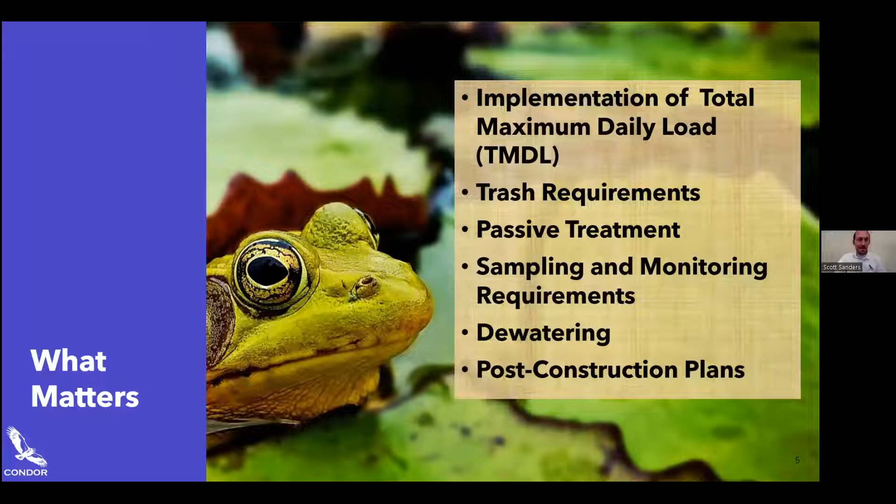New stuff in the permit. All right, so I want to start with some important dates. We do have a new permit, so when does it all kick in?

Well, it's not going to be until next year - the effective date of the new permit is September 1st, 2023. That means if you get a WDID number after that date, you will be complying with the new permit. If you get a WDID number issued before that date, then you will be complying with the 2009 old permit all the way up until September 1st, 2025. They'll give you time to get used to that new permit. So after September 1st, 2025, we'll all be in the new world with our new permit here.

And then we're going to begin the new permit part of the show with - what is a TMDL? Well, if you're new to the stormwater world, or you've been in here, you know we love our abbreviations and acronyms. TMDL means, of course, 'too many darn letters' is what we got to remember, and everything has an acronym or abbreviation. But TMDL means total maximum daily load. Now, how can we show this easily to people who might not really grasp the idea of what a total maximum daily load is?

Let's pretend we have a river. I'm actually doing this presentation in Petaluma, so I'll kind of theme some of my rivers and stuff to stuff around here.

This is about rivers flowing into the ocean. So let's pretend this is our Napa River right here, and we have sources of pollutants coming from agricultural, natural, industry, and residential impact. Well, with the new construction general permit, we're adding construction right there into it as one of the polluters going into this Napa River.

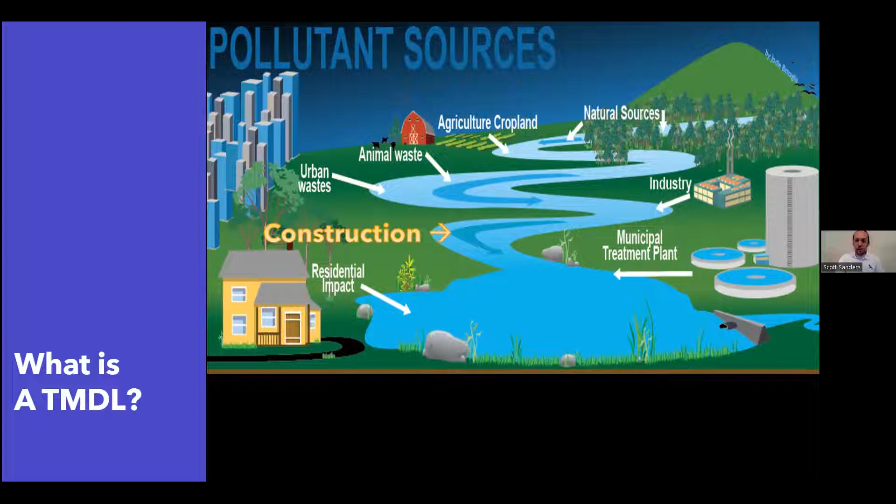So how do we get a TMDL? Well, we get some highly trained scientists to get on the case, and they can spend anywhere from 4 to 6 years analyzing the river, seeing its beneficial uses, seeing who's polluting it, what pollutants are going in there, and then they realize a certain level that this river can accept. That's going to be your total maximum daily load.

That's going to be what you as a construction site can put into that river to keep its beneficial uses going. So what does that mean for you as a SWPPP QSD? Well, that means that when you're creating your SWPPP, you're going to have to find out if you're a responsible discharger. How do you find out? Table H. Table H in the new permit will go over all the TMDLs in the water bodies you're working around.

If you're in region 5, you know who cares about TMDLs? The fish. So our little friend, the fish, is going to stick in on this part of the presentation because he's very interested in this. So if you're in region 5, you actually don't have any TMDLs to worry about right now.

So you're all good. I'm in Petaluma over here, so I'm looking at region 2. Napa River has a sediment TMDL. So I found out, yeah, my construction site's on the Napa River. I'm discharging right into it. I'm a responsible discharger. The TMDL is sediment. What does that mean? The new permit will explain for you.

You look for which constituent that you're discharging into there. We're doing sediment. So to comply with this new permit, you're going to have to do RUSLE2 modeling. You're going to have to show that the BMPs you're putting on your site are going to bring your waste load allocation number down.

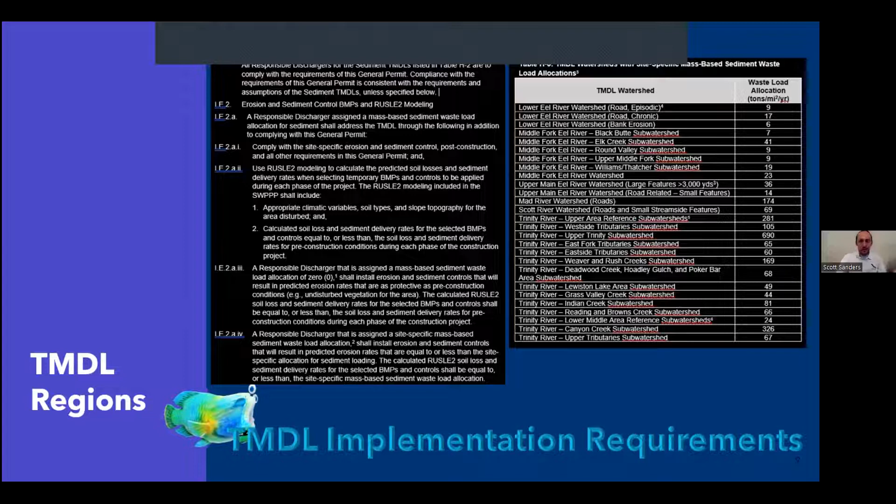I went to look for the Napa River. It wasn't here in table H3. They had a little side note that said go look at the fact sheet if you want to find out about your river. So I did. And what the fact sheet told me was the Napa River has a TMDL of 500 tons per year. So why wasn't it over here in table H?

Well, they say that's the current natural load of construction sites anyway. So what they're saying is if you comply with this permit the way it's written, you're going to comply with that TMDL. So it was easy for that one. But other ones, you might have to comply with the waste load allocation number that's different, and that means extra sampling and extra BMPs to bring your numbers down.

All right, and that was it for TMDLs. That's a big thing going on, but again, those TMDLs are only going to be for responsible dischargers. So you might be in an area where there are no TMDLs, and you're going to be okay.

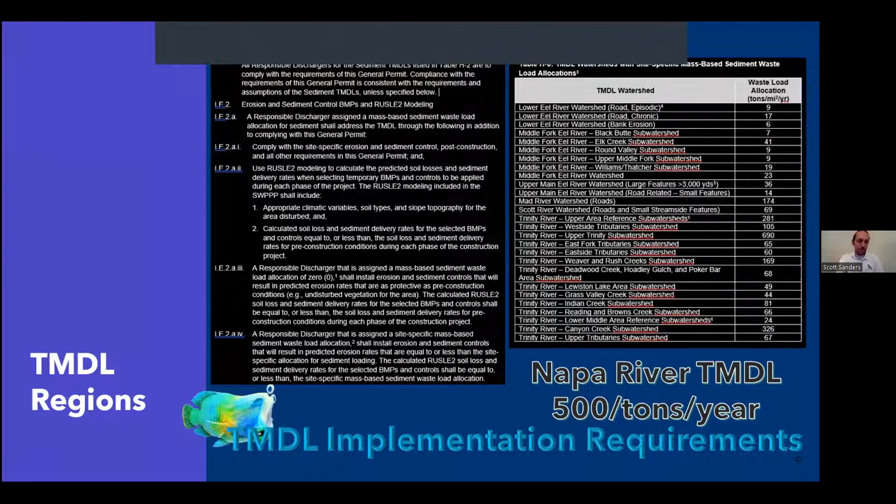So what does that mean? Are we going to be installing full capture systems on our sites? I'm not sure where the permit's going with this, but we're going to have to limit any trash from leaving the site—not unlike the order that municipalities have to follow. They have to do monitoring requirements, track 1 or track 2. I haven't seen those yet in the new permit, but it's something to keep an eye on.

Passive treatment technologies—these are also going to be fortified in the new permit. The way things have been going, they're trying to change it up.

So for those using passive treatment, a quick overview: passive treatment means you're putting chemicals in the water, they bind to the soil and sediment, and weigh it down, leaving you with clean water. Hopefully that clean water gets sent downstream.

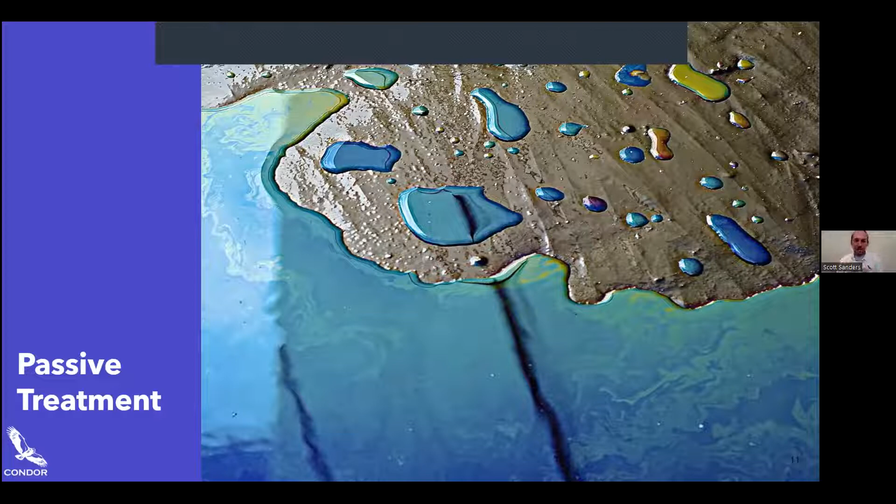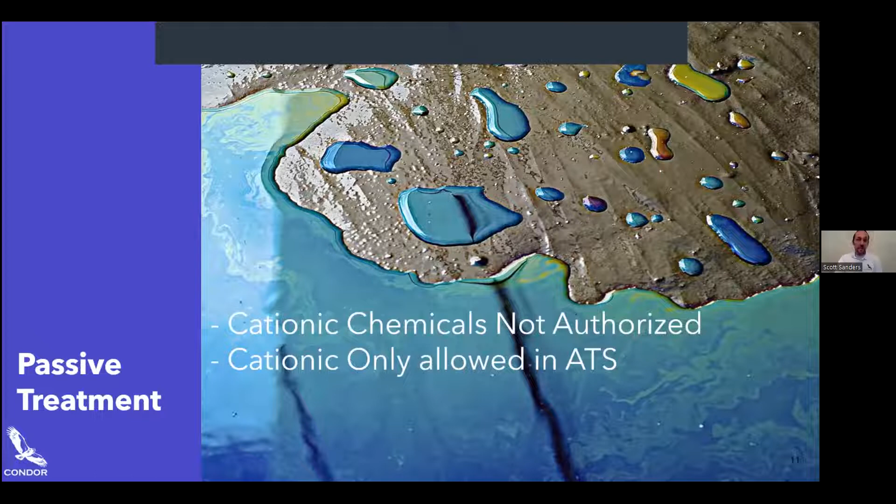But what they're finding is that water sent downstream is causing problems with fish gills. So what are they doing? They're removing cationic chemicals - they're not authorized in this new permit unless they're being used in an ATS system. Anionic chemicals are authorized, but if you use them,

you're going to have to come up with a passive treatment plan. The QSD will have to create this plan, and the engineer will have to design your outfall area with dissipation devices, so that when you're discharging water, you're not causing more impairments.

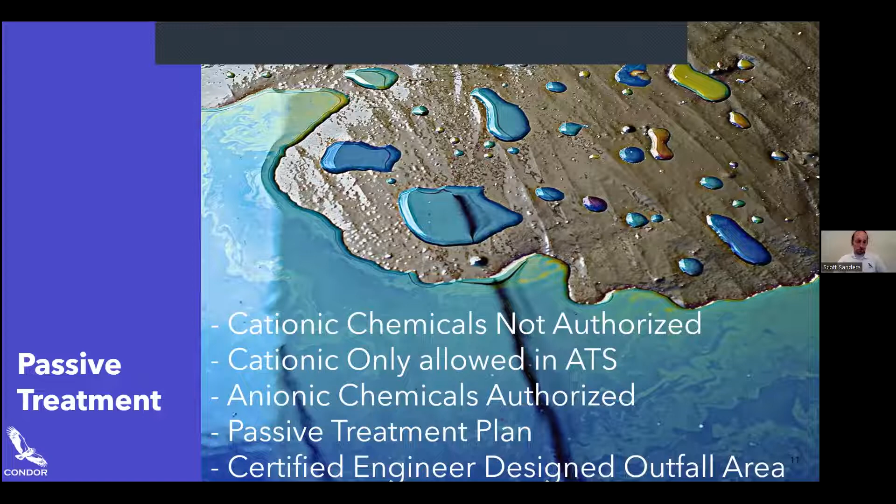Another big thing - NONA. If you're in the industrial world, you might be familiar with Notices of Non-Applicability. Well, it's coming to the CGP world. Basically, if you can prove it, it's no CGP for you. You'll need a certified hydrologist to prove that your site does not discharge into a Water of the United States. If you can prove you're not discharging into any of those nexuses, you can apply for a NONA. That means you'll get issued a WDID number but won't need to follow the permit guidelines.

All right, now sampling and monitoring. These are big changes - as a QSD, these are big changes for me, for the client, for everyone. They're trying to limit those frequent flyer miles by the QSD - or not really limit it, they're actually going to increase it, trying to prevent QSDs from not living near their projects.

So what does that mean? They're going to make the QSD take a lot more trips to the project. They'll require it twice annually, after an NAL exceedance, at each phase change, and anytime a QSD is replaced, the new one will have to come out to the project.

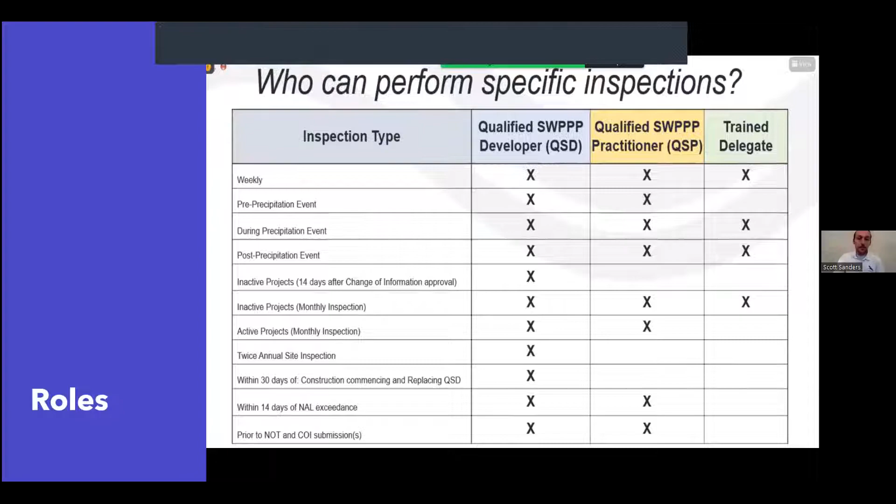And what does all this mean with more involvement from QSDs and QSPs? Well, it means no more REAPs - we can all say goodbye to the REAP. I'm sure we all loved filling those out. It was shown that it might not have been the most useful document.

So we can pretend we're removing it, but really we're beefing up the pre-inspection, creating one document to help it, because now only a QSP or QSD can perform that pre-inspection - similar to the REAP, where you had to be a QSP. So even though there's no more REAPs, it's now folded into your pre-inspection.

And here was the big one, qualifying precipitation event, a new abbreviation to remember, QPE. What's the big change? Well, it's based on forecast and not just on accumulation. So this is going to be pretty big right now. It's going to make planning and scheduling your inspectors a lot easier.

We can read this definition. Qualifying precipitation event is any weather pattern forecast to have 50% greater probability of precipitation, POP, P-O-P. Not sure which stormwater professionals are going to use going forward. But then you also have the quantitative precipitation forecast of 0.5 inches or more.

So what does all this mean? Let's try breaking it down in a calendar so we can see it with our eyes. Okay, so here's the NOAA forecast table. This is where the permit wants you to look, this is where they want your eyes to go when you're forecasting those rain events. So as we can see, these first two days, Monday and Tuesday, this isn't real world data. I changed other data to make this presentation work.

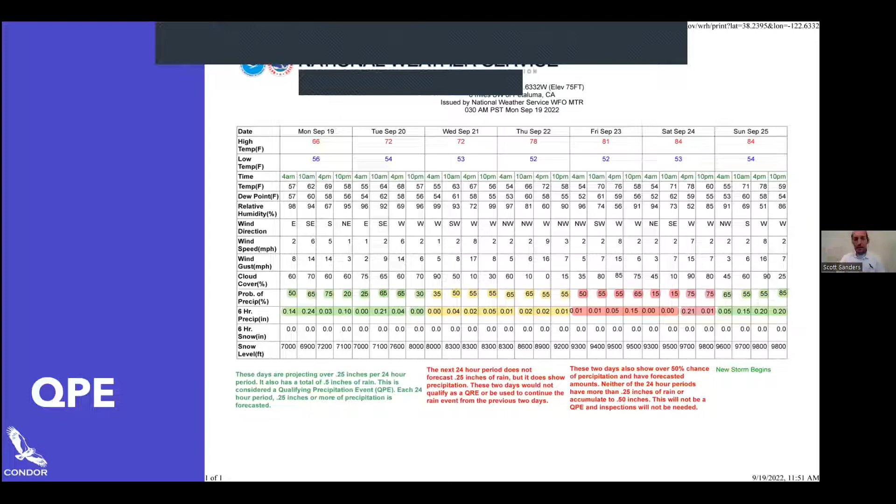Just to throw it on there too, they're increasing our hours for pre-inspections, which is great news too. It helps us schedule things a lot easier for us. 72 to 120 hours, I did the math for you, that's 3 to 5 days. 5 days out, you can start your pre-inspections for that pre-rain event.

We go back to our calendar, we go to the next days. We're getting up some bigger totals, 0.15 inches of rain on Friday. But again, we're not at that quarter inch, so this would technically not be a stormwater qualifying event to do an inspection. But then we got Sunday, we're back over that half inch of rain, back over that 50%. That's another rain event.

Post inspections for that Monday, Tuesday rain event, I kind of came out of order there. You now also get 90 hours to get that, and that's 4 days. So now we have 4 days to do a post rain event. They're just giving us more time. This is great for all of us schedulers who are trying to figure out how to get all our inspectors to the sites for these multiple inspections.

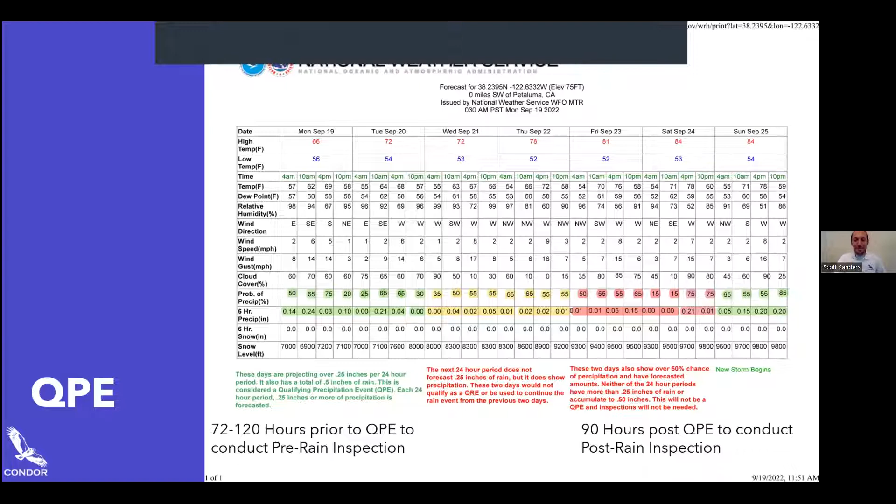So that's kind of a breakdown of the new qualifying precipitation event. We got a new abbreviation to remember, but hopefully that made a little more sense.

All right, dewatering. So we do have some more dewatering requirements. I heard them mentioned in yesterday's presentation, and we're going to bring them up again. So what's the permit doing? Well, it's kind of bringing everyone together. There's certain regions that have their own low threat, low discharge dewatering permits that you should be getting. But the permit's now making that across the board. So what does that mean?

It's not just dewatering groundwater. This is going to be dewatering depressions, low spots, puddles, anything that you're dewatering with mechanical means. Rosenbaum yesterday said that was going to be mostly pumps is what they're talking about. So if you're doing pumps, you're going to have a dewatering plan. If you're dewatering your trenches after a rain, or dewatering just any low spot, you're going to have your QSD come up with a plan for the specific dewatering procedure.

And in that plan, they're going to have a map. They're going to have to show what BMPs are being used. And it's just going to be a lot of work to put in for these new dewatering procedures, something to just keep an eye on going forward.

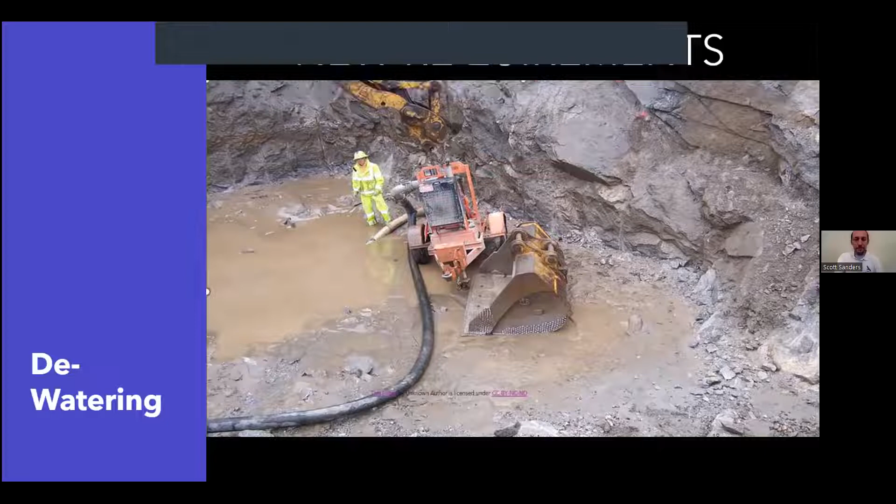All right, post-construction plans. This one had a little heated debate on the adoption day in September, and the compromise is instead of needing your low impact development, your post-construction plans, what your swales are doing, what your basins are doing and everything, they want those plans at the beginning when you're submitting your SWPPP. So they wanted full final plans, but they've negotiated that preliminary plans will be required to get a WDID number. They want them included with the SWPPP. So that's a new change.

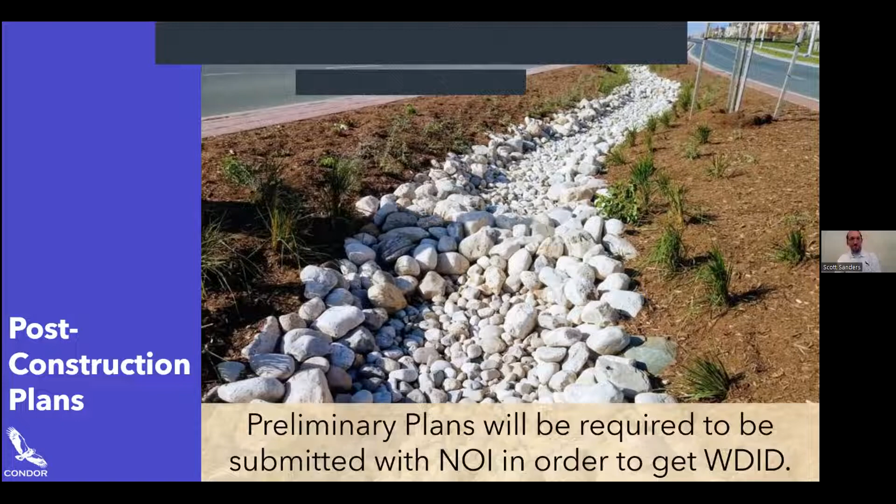And going forward, you're going to have to put that plan right there with your SWPPP. So that's always good too. And that brings us out of what I thought was important with the new permit. Not everything I thought, I could do a whole presentation on it, but for right now, that's some main topics of the new permit. I recommend going out, reading it. These permits are lengthy and there's a lot of words to understand. So getting a head start right now is probably the best bet.

So this section right here, in between each section, I kind of want to just bring it back, why we do what we do. It always changes for all of us. When I was in my 20s, it was whatever I wanted, you know. Now I have a little boy, so now all my focus is on what he needs, and that's why I do what I do. And the whole point of me doing this presentation is part of that, is I want to create a way where we all can work together, because finding a way to be in compliance, it takes a team. It takes regulators, it takes us consultants, it takes the client, the builder, and it's all of us working together, finding a solid plan and making it economically feasible for all of us. So that's what I strive to do in my work, and that's why I give presentations like this, so we all can have this collective energy of doing what works for each of our specific sites.

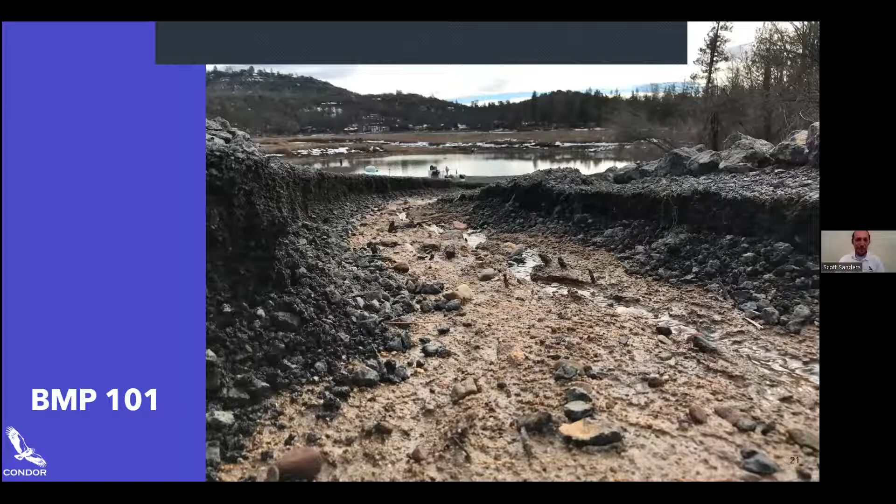All right, BMP 101. So this section's changed quite a few times. What I did was I kind of threw out a questionnaire. I asked some of my colleagues just stuff that they see in the field that they thought was common sense, but they keep seeing it. So these are just collective ideas. Maybe to some of you, you're like, yeah, why are people still doing this? So I just kind of want to bring them out.

But first, we're going to do a little acronym or abbreviation. So that's one thing I see in the field. A lot of people are kind of confused on what's an acronym and what's an abbreviation. Well, let's go through it right here with you today so we can solve it. SWIP, well, for one, it's an acronym, but we need to stop saying it, okay? It's not SWIPy, it's SWIP. I don't know if someone's just saying the P individually at the end or actually adding a Y. I'm confused myself when I hear it. It's SWIP. I even see SWIP plan, which is more understandable. I can see you're taking that P out of the word SWIP. Okay, SWIP, it's an acronym.

BMP, what do we got? It's an abbreviation. SOAR, that's me, I'm a SOAR. I'm a steward of ocean, rivers, and earth. That's an acronym. And QSD, abbreviation. So how do we know the difference between acronym and abbreviation for everyone going forward? If you say the word like SWIP, you're an acronym. If you're saying each individual letter, you're an abbreviation. All right, too much time spent on that.

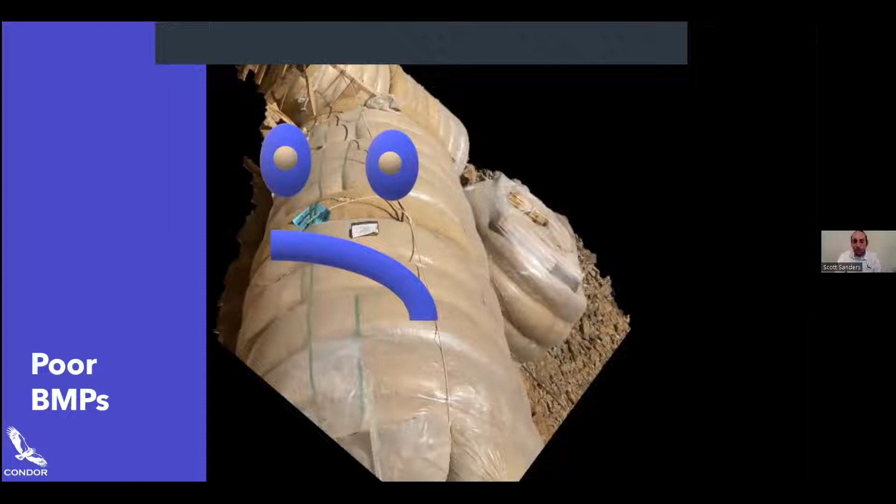Let's go to our BMPs. Poor BMPs, what am I talking about? I'm talking about sad BMPs, of course. This one's lying on the side of the road. They're poor, okay? They're the poor wattle that never catch a break, only catches the steak, right? No, I'm not talking about the sad wattle on the side of the road. What I'm talking about, and like I somewhat mentioned earlier, you're only as good as your QSD. You're also only as good as your BMP installers. BMP installers can make or break a site. And that's because it can all look great on paper, but when you're installing it, things need to be done correctly.

I recommend having your QSP be there with installers most of the time, or at least do a lot of training with your installers. It's required in the permit that the installers have training. And the more I go out there to look at things, the more I see that there's not a lot of training for installers.

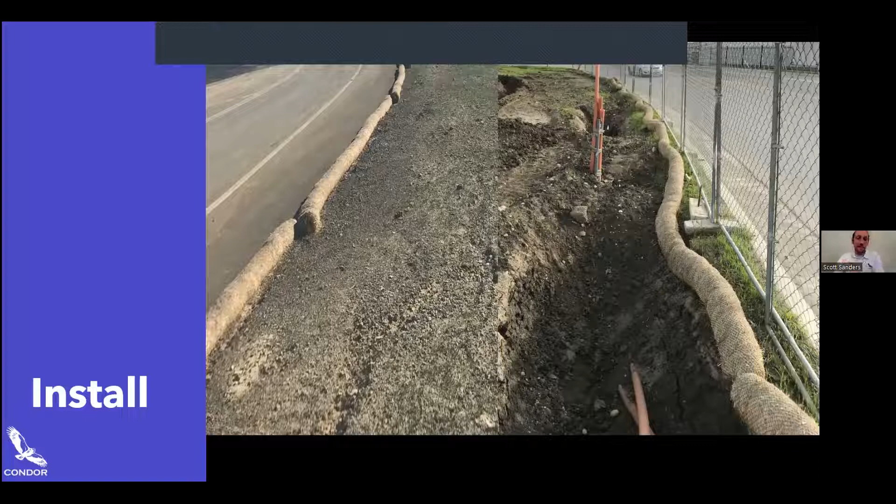I didn't think this was a big debate, but 3x6 angular rock, everyone, for stabilized construction entrances. I see so many times little pebbles being used, little rocks or gravel. We need 3x6 angular rock. How do I know that?

Well, this is another long-lost book that I see a lot of people don't read, the CASQA guidelines. I feel that every BMP installer should have these CASQA guidelines printed and kept in the back of their work vehicle. It explains to a T exactly how each BMP should be installed and where it should go. It says use 3x6, make it 50 feet if you can, make it 10 feet wide minimum. And every once in a while you got to refresh that rock, because otherwise it just becomes another flat driving surface.

Always street sweep as well. Sometimes these aren't good alone. A lot of people, even though they're expensive, think you can just use the stabilized construction entrance. It's one of the BMPs in our playbook.

Again, the CASQA guideline book - I also agree that all QSPs, all trained delegates, QSDs, we should always be reading that book. Again, most construction sites have the same BMPs, so you don't have to read every single one, but it'll tell you a lot of important information. It'll make your QSPs smarter with inspecting.

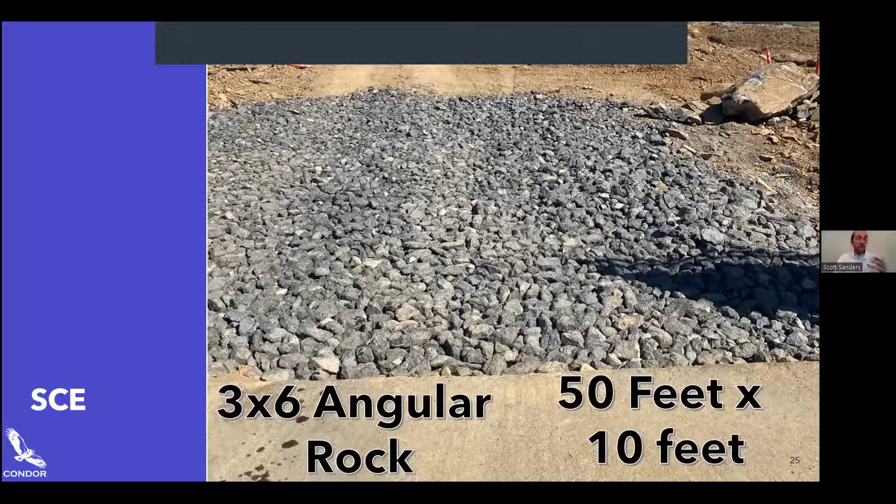Sometimes it's hard to tell what went wrong. A lot of the times it's easy, but here it could be a number of things. One, I could blame the compaction, the guy who engineered this slope. Maybe the compaction was wrong, and even though you put BMPs, raindrops still find a way in there.

If you got room right there, do it. But also silt fence is more efficient away from the toe of slope. So here, you never know. It could just be compaction, it could be BMPs, but sometimes there's failures that you just realize you have to regroup and create a better plan, and that's no problem with that either. We can agree that we all make mistakes.

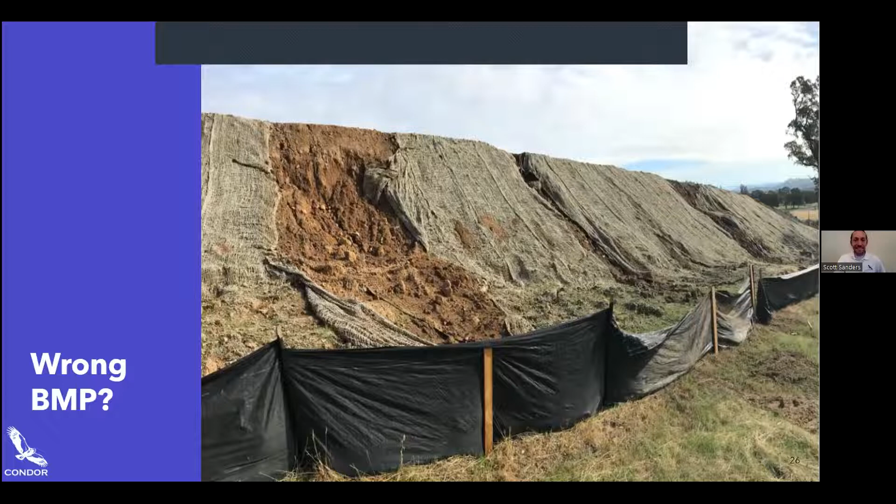All right, here's a good one too. The CASQA guidelines, I will always recommend them, and that's part of training, that's part of forward planning. If your BMP installers know how to install BMPs, they're going to save your project. The best inspectors I've had used to be BMP installers, because once you know how to install them, they're way easier to inspect. You feel more confident inspecting them.

But we always run into problems like this too, where if you read those CASQA guidelines, it would tell you silt fence to silt fence, you got to wrap them up together and they need to be continuous. And this is where forward planning is. This is knowing how long your rolls are, knowing where your low spots are. Be the rain. Where is it going to flow? Where is it going to be?

And even after a rain event and you have failures like this, it isn't just a failure, this is a learning experience. This is, we now know low spot here. We're going to have to put some extra maybe fiber rolls to dissipate some of that water flow, because a lot of it's being concentrated to this area and destroying the BMPs that are currently there.

So again, training, forward planning, be the raindrop, not only as an inspector, but also as an installer, because we're only as good as our trifecta, our QSD, our QSP, and our installers. That's the line of what we need to follow.

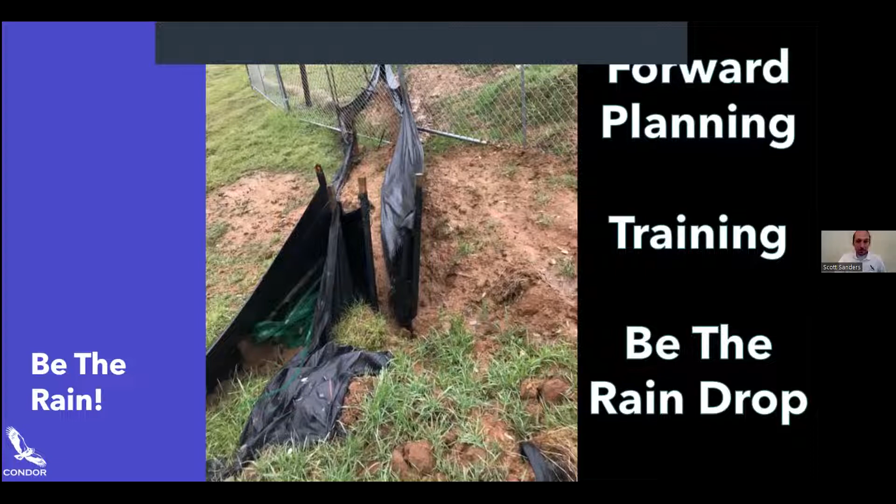You look in the CASQA guidelines, nowhere does it say that you should be putting fiber roll right up onto your silt fence. So if you're a developer and you're watching this and your QSD or QSP is telling you, let's put silt fence and wattle right next to each other and go around your 600-acre property because we're going to get extra protection, just be like, let's talk about this a little further.

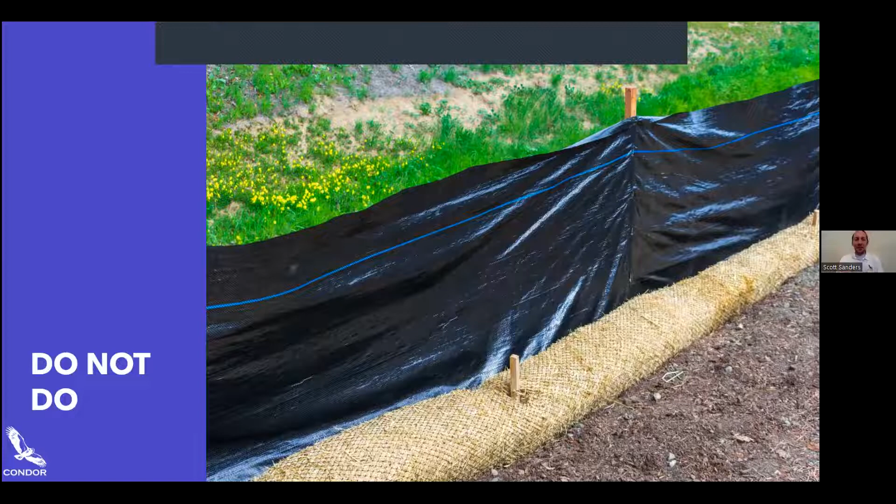All right, and that was the end of the BMP section there. Again, why we do this, just I like to take a pause every once in a while, and the way we make environmental compliance work is us all working together. That's the developer, that's us consultants, and that's the regulators.

We all need to create plans that work effectively for all of us, and that's why we do this. That's why we hold these presentations, have these topics, to find better ways to improve the way we do things, so that going forward, we're not wasting energy, we're not wasting time. More importantly, we're not wasting money. And when we do those things and protect the environment, that's how we all win.

And that's what we all are striving to do. So I'm glad all of you participants in here, you're already taking that step to working together to find common ground to help combat some of these issues that we're all facing.

Okay, and now this brings us into our new technologies in stormwater. I had my colleague Jeremiah put together a little video. I've always been interested in using drones for inspections, and I kind of said, can you put together something on how we use UAV for stormwater inspections? And here's a video that I'd like to show you that he put together for this presentation.

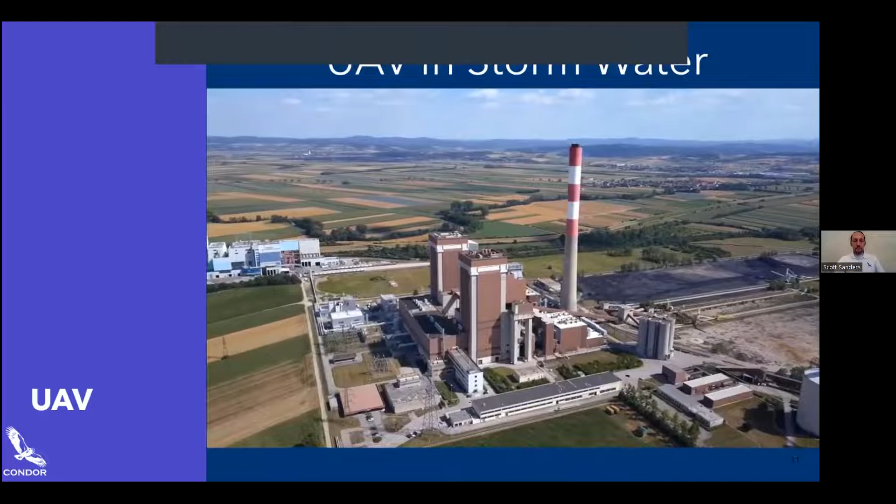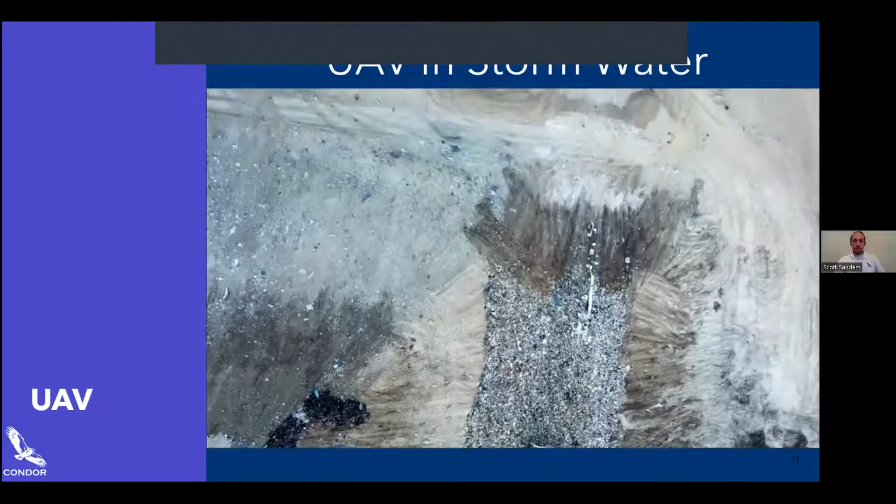Utilizing a UAV, personnel conducting an inspection can gather highly detailed site information from a safe location or to reduce the need for future return trips to the site.

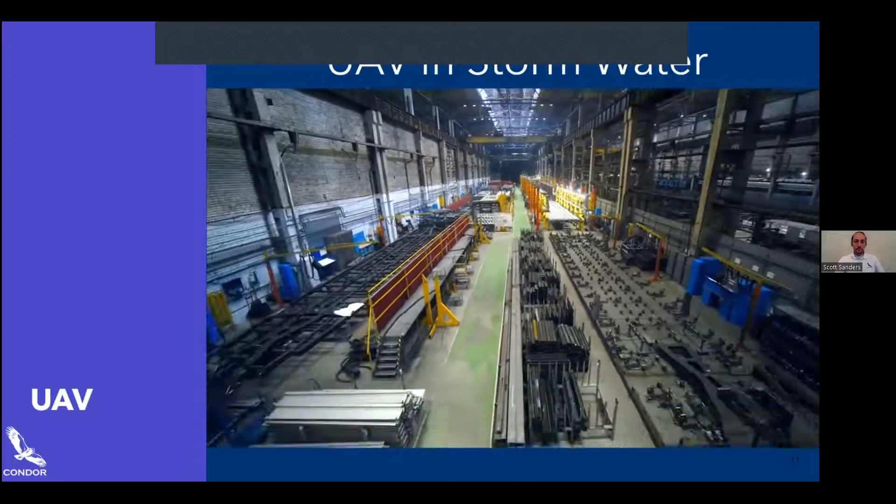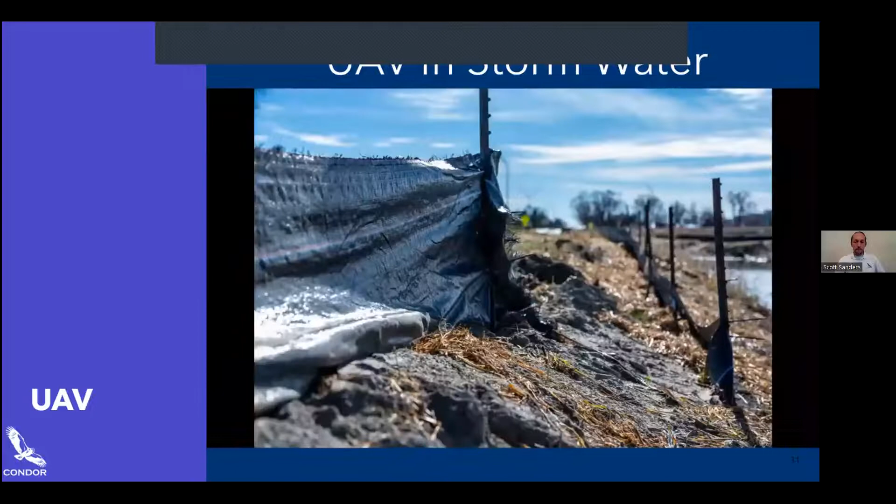By doing this, they can focus on more critical items on their inspection list, such as inspecting BMPs, auditing failed stormwater control measures, educating site personnel about stormwater management, or strategizing with site personnel on how to implement best management practices.

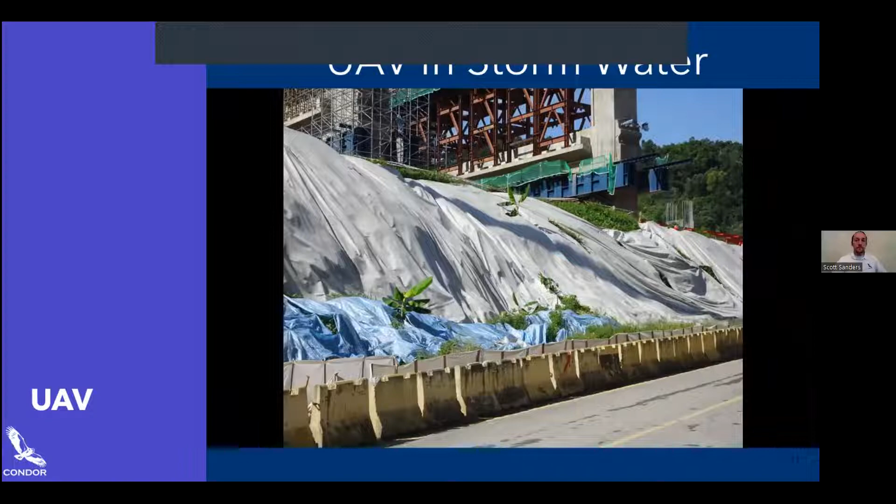At Condor, we utilize high-accuracy GPS and ground control tiles that are visible from the air. This way, UAVs can gather very dense elevation data that can be used to enhance inspections.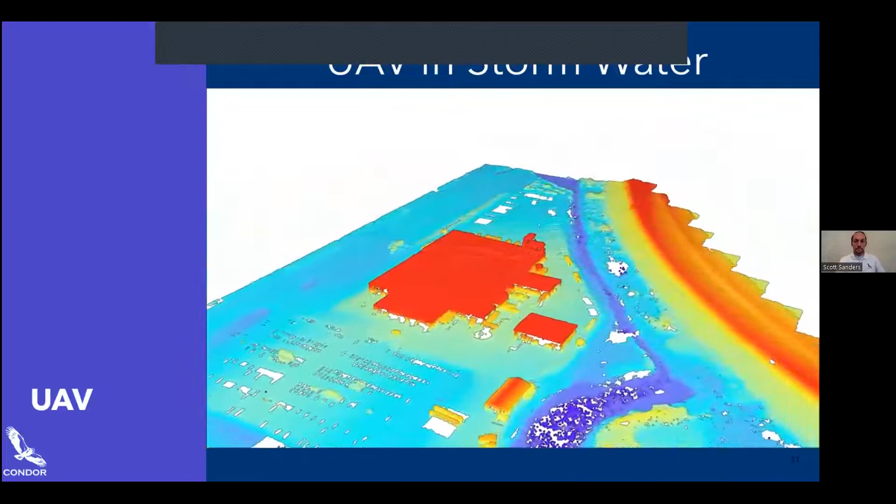As you can see here, this point cloud was gathered using photogrammetry and thousands of images taken over a pre-programmed flight. The point cloud was then cleaned to show only ground and structures that would contribute to stormwater runoff, then transformed into a high-resolution digital elevation model.

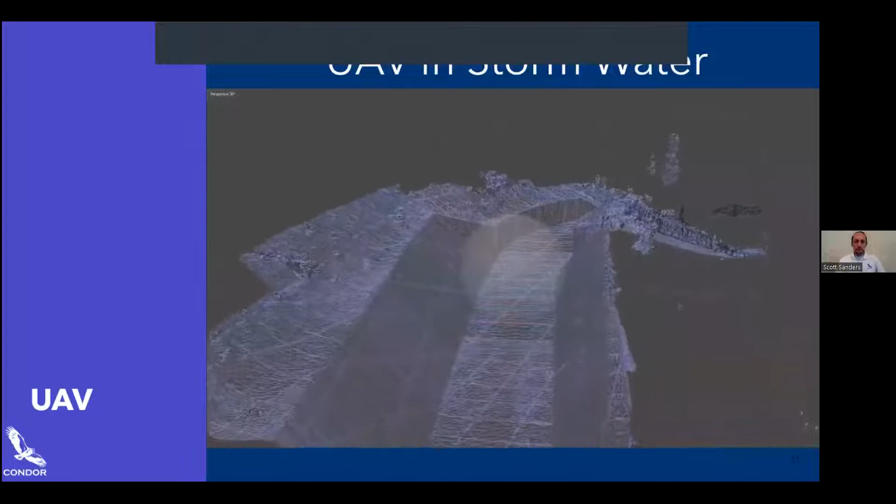The creation of this elevation data is done through triangulating a network of points, then compressing it to a 2.5D image representing site topography.

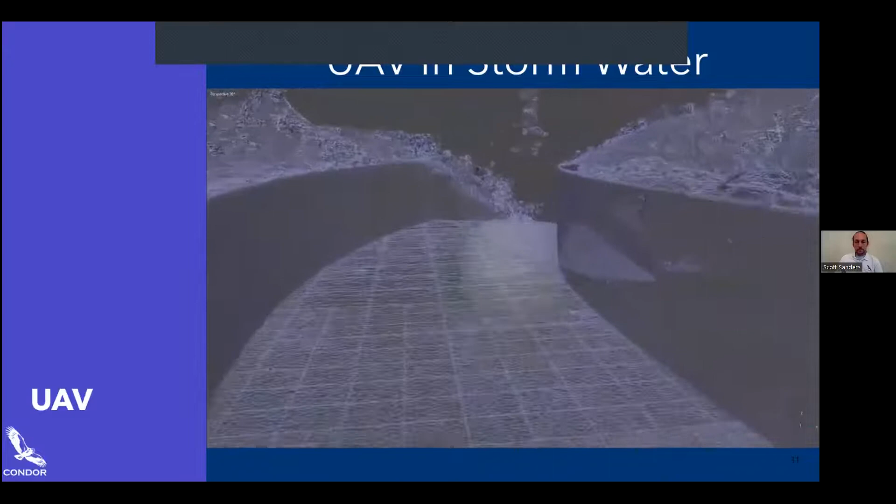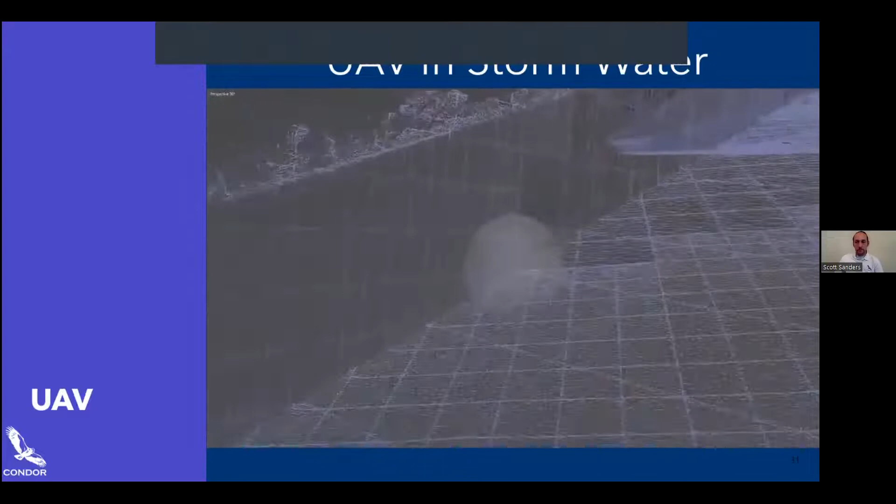What you are seeing now is the resulting high-resolution digital elevation model from the point cloud shown earlier. This model can be used as the input for many analyses focusing on stormwater management.

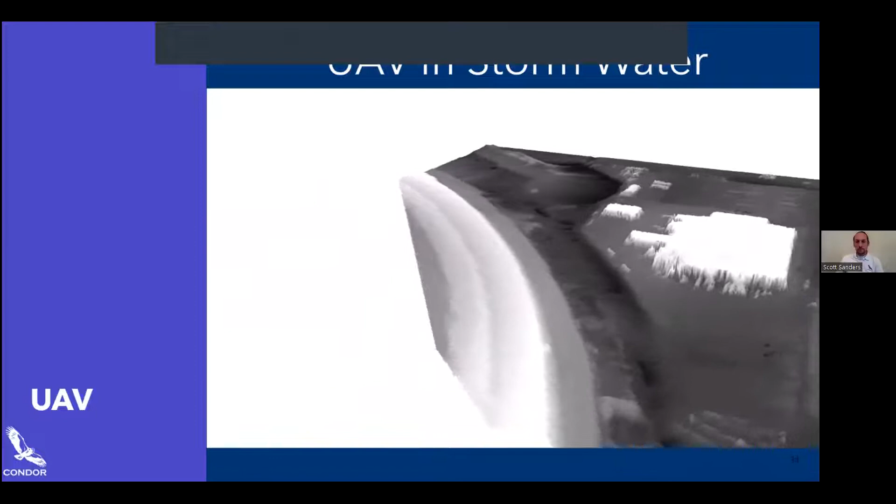Using hydrologic spatial analyses, we were able to determine drainage areas for the site you see now for use in their stormwater control measures across the facility.

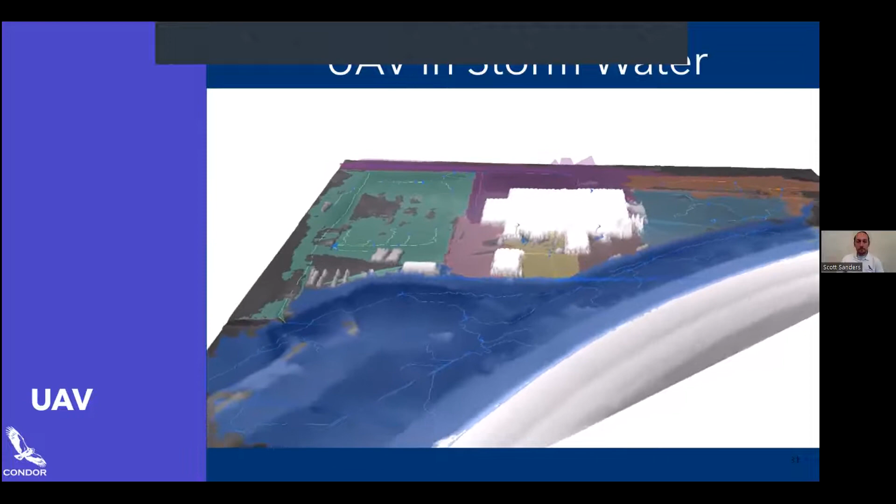Other products of this data can be volumetric estimates of site or storage capacity and modeling containment improvements to mitigate off-site discharge.

I've already covered many of the pros about using a UAV for site inspections, but there are a couple more you should be aware of. What you're seeing now are some examples of sites where a UAV may better serve the site inspection than simply walking the site on foot.

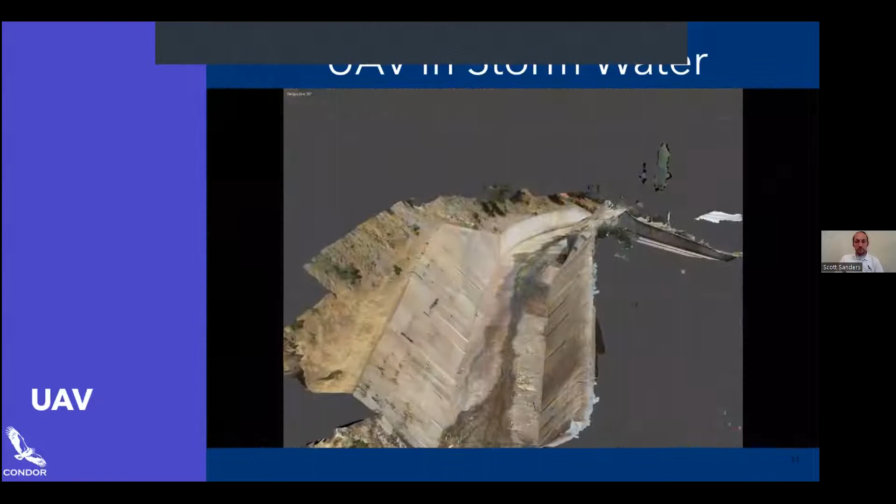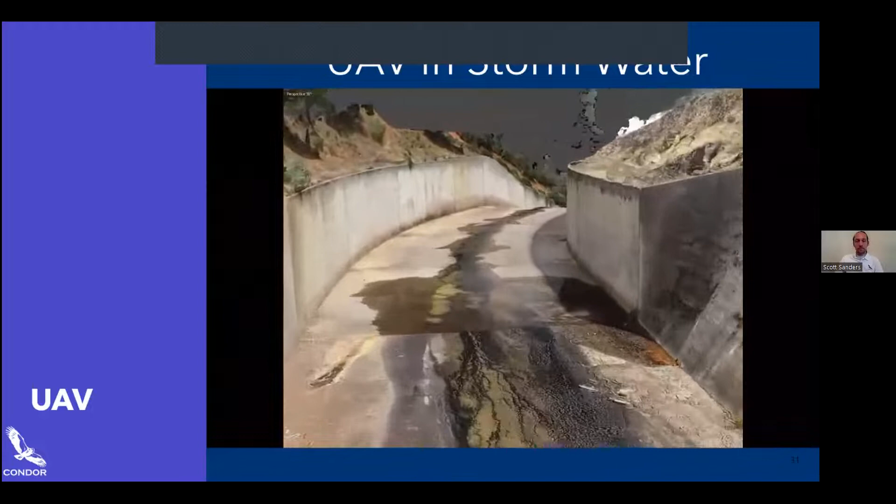As you can see, extremely detailed models can be generated like this one. This model is of a spillway that was created using a UAV. Personnel are able to pan, rotate, zoom in and out, and inspect the model without needing to go into a potentially dangerous area.

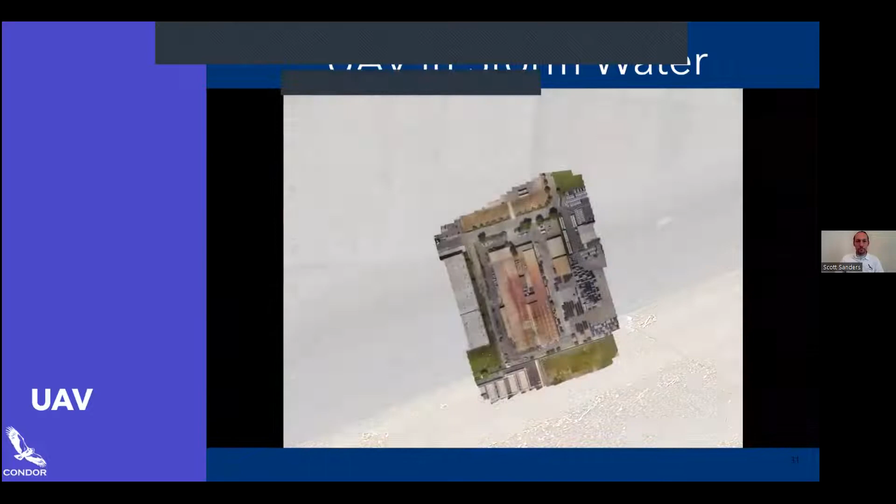This is an example of an orthophoto generated using a UAV. It shows the level of detail one can achieve and again highlights why personnel can reduce return visits to the site.

Now let's talk about some cons. One of the biggest is that UAV licensed pilots aren't allowed to fly over humans or vehicles not actively participating in the operation. However, as you're seeing now, these are the FAA's exceptions to that rule.

The first exception, Category 1, is simple. You only need a UAV that weighs half a pound or less and has no exposed rotating parts. This generally means installing propeller guards on most drones.

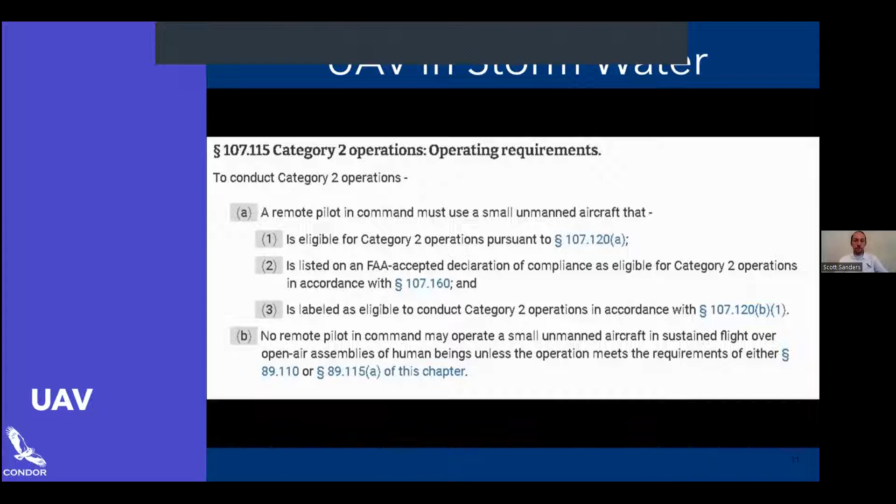Categories 2, 3, and 4 require additional conditions be met, and there are currently no drones approved by the FAA that meet these criteria. However, waivers can still be obtained through the FAA for operations over people.

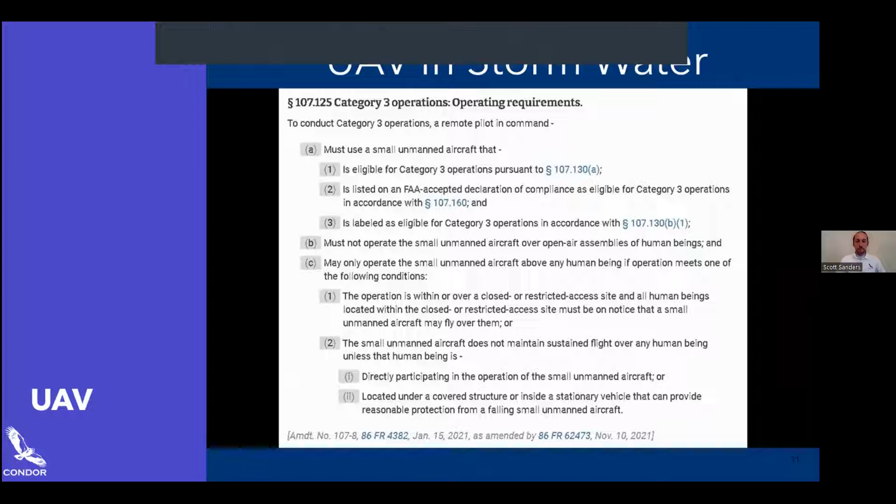Hopefully, you now have a better understanding of how UAVs can help protect our waterways. Thank you, and enjoy the rest of the seminar.

I want to say thanks again to Jeremiah for making that for me. And just to go off what he was saying there, UAVs are not going to be meant for every inspection site. You've got your small construction sites of residential homes. It doesn't replace walking on the ground and looking at stormwater control measures that you need to be on foot.

But for larger sites, for your 500-acre sites where you have silt fence surrounding the entire thing, flying that and looking for damage is going to be so much easier than driving or walking if you can't drive. So areas like that where it says you can't fly over human beings, that's a problem too for these inspections.

But to get around that, sometimes time of day is important. So if you go to a time of day where there's no one outside or no one's at the site, then you can usually fly easily around that. But again, always look at those regulations because those are important to follow going forward as drones are being used more and more in every industry, it seems like.

All right, and then the next technology that I wanted to talk about is for on-land visual trash assessments. So if you're a municipality, if you're industrial, or if you're Caltrans, you have these new on-land visual trash assessments.

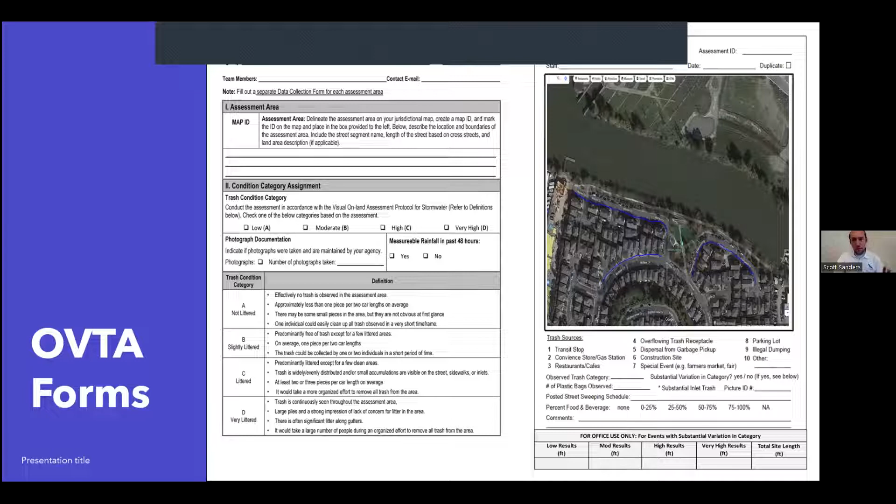So what's been created, we're on the forefront at Condor, and I'm sure this will be going everywhere, is this automated and streamlined data website that you can visit. You can take your assessment forms, put in the data into this website, and what it's going to do is create a living map for you.

And this living map is something that a municipality can log into, and it's going to have all the data right there for you in a nice way to present it. Because the problem is we get all this data, but if we can't present it in a correct way, we're not going to use it efficiently.

So what we're doing is we're taking all those assessments and plugging them into this interactive map. So now if you're out creating these forms, we're highlighting the data and figuring out what it means, and what we're worried about.

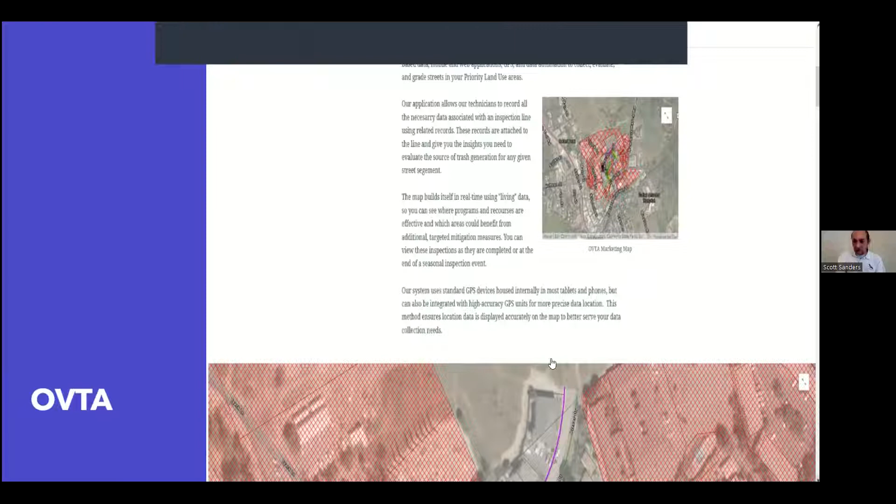Here, this is one of the interactive maps. You can show your inspection records. You would click on one of these lines. It's purple for a reason, color coded to what kind of trash was found there. It tells you when it was inspected, who it was inspected by, and what they found there and what grade it received.

And this is all logged in the database, which can then be turned into graphs, or any useful information that you're presenting to show that you won't need a full capturing system because what you're doing is equivalent to removing that trash from your streets. The first way you can do that is having these assessments and knowing where the trash is. So this live map just brings all that data together.

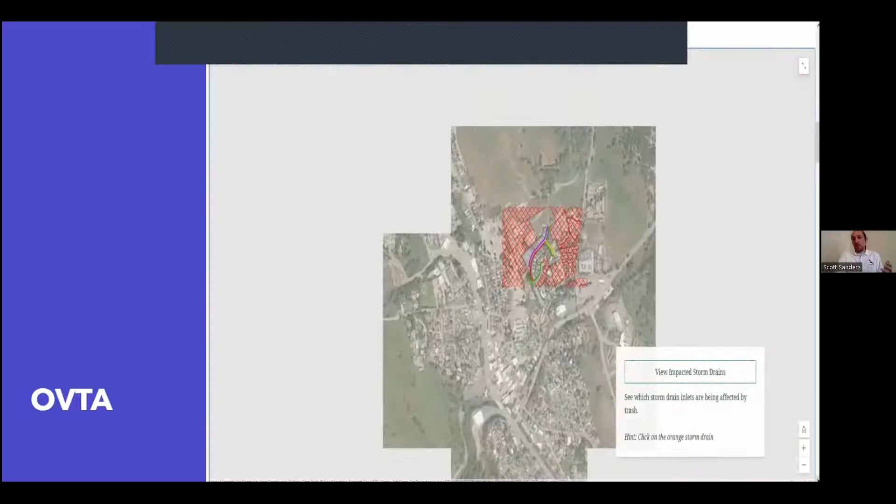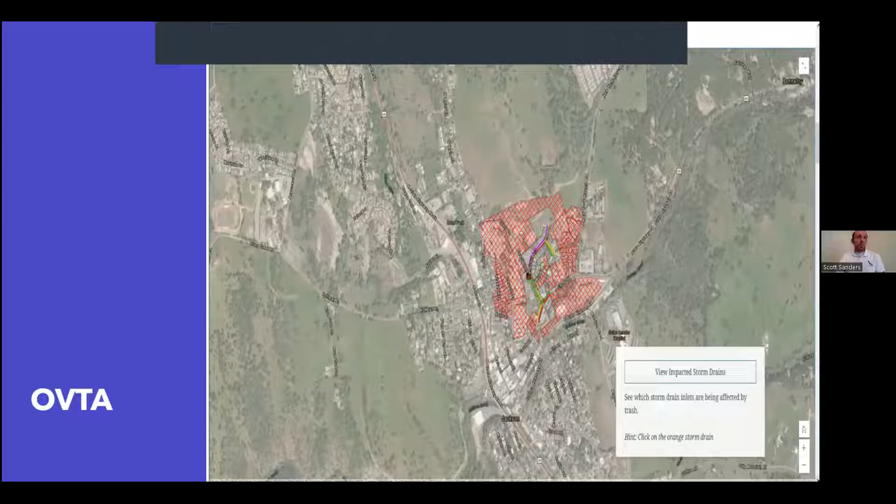But it doesn't just talk about where the trash is. This data can also show you which storm drains are impacted. And with that data, you can send your maintenance crews to go clean specific storm drains that have been impacted, because during these assessments, you're already out there.

So the data we're gathering, you would click on the map, it shows you where all the drain inlets are. You'll be able to use this GIS data to compare with maps in your own place of business to see that these storm drains are accurate.

We click on a storm drain and it will show you a picture of the storm drain. It'll tell you, is it impacted? No. Another requirement of municipalities is you must have signage on all your storm drains. So this program also shows you right there, has it got signage? It doesn't. That'll also help save time and energy because now municipalities can send people directly to specific areas to figure out where there's no signage and where it's needed.

Going a little deeper, you can see where illegal dumping is occurring. These little hot spots get shown on there, and you can click on it. Not only that, it'll show you a picture of the illegal dump. Again, it's just helping the maintenance crews go directly to where it is, so they're not wasting time trying to find it because it's already been logged and recorded.

The perfect thing about this is, how are we going to save more time and be more efficient? Well, instead of taking all those forms and paperwork, we now have an app and you can do it right there in the field. You can put it on your phone, put it on your tablet, log in, and do everything directly from an app. Now all this data, we're removing the paper, and creating this whole living map in real time while the inspector's on the ground. That's going to be huge. It's a new way to show the data collected so it can be used by a municipality, Caltrans, to help focus their energy on a specific area.

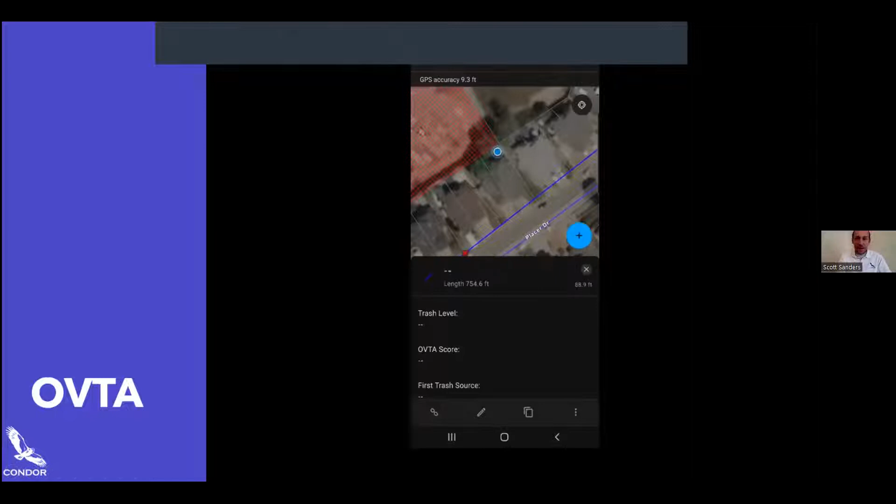This was the app playing here. You can zoom in, create the lines yourself, say what trash level it is, and all this data gets stored. It can then be logged in later, and you can use it however you need to figure out how to control a trash problem in your area.

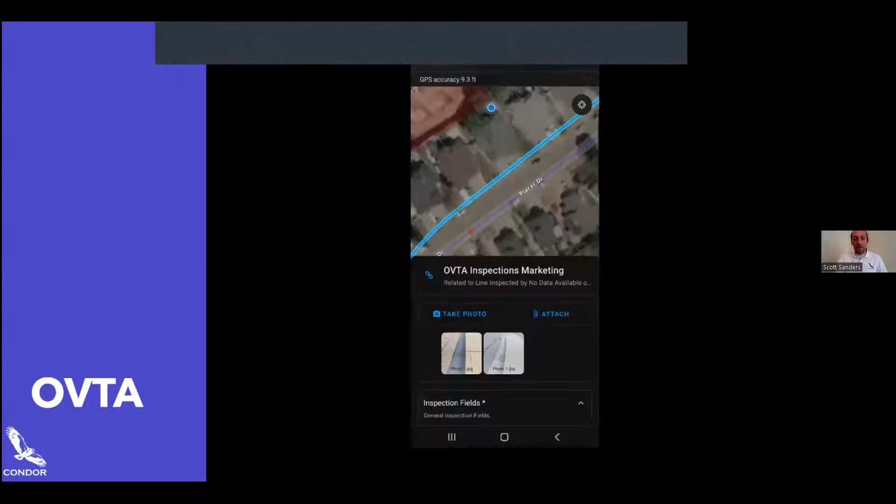So that's just new technology in the OVTA world. If that's something that you're in, this is something you really want to get looking into, because it's just going to streamline a whole bunch of efforts down the road.

So now we're switching from those technologies, good ones, back to sampling 101. Why did I want to end with sampling? It was kind of a last minute addition because of all the new sampling required by the permit. I'm going to go pretty quick here.

But first, be aware of your surroundings. There could be sharks in the water, so be careful where you're sampling and make sure it's a safe area. If not, get out of there. We start off, I recommend the Stormwater Sampling Field Guide by the State Water Resources Control Board. Great video, go YouTube it. This is great training for all your staff—have them watch it, important stuff. Good job, Water Board, on this video.

All right, so you're the sampler. Let's prepare for our sampling. You're going to want to review requirements, contact your lab, train personnel, and locate equipment. So what does that mean? Well, your SWPPP or someone else should have created a monitoring sampling plan.

You're only as good as the plan you're following. This plan needs to show: why do we sample? We're discharging to an impaired water body—it should say that. What do we sample for? Napa River, sampling for sediment. Where do we sample? Discharge location. This should all be in that plan.

When do we sample? That's a big one—it's different for industrial and different for construction, so knowing those times is important. And how do we sample? Is it with a turbidity meter? Are we sending bottles to the lab? There might be a lot of new ideas with the new TMDL requirements, so this is going to be important stuff to know.

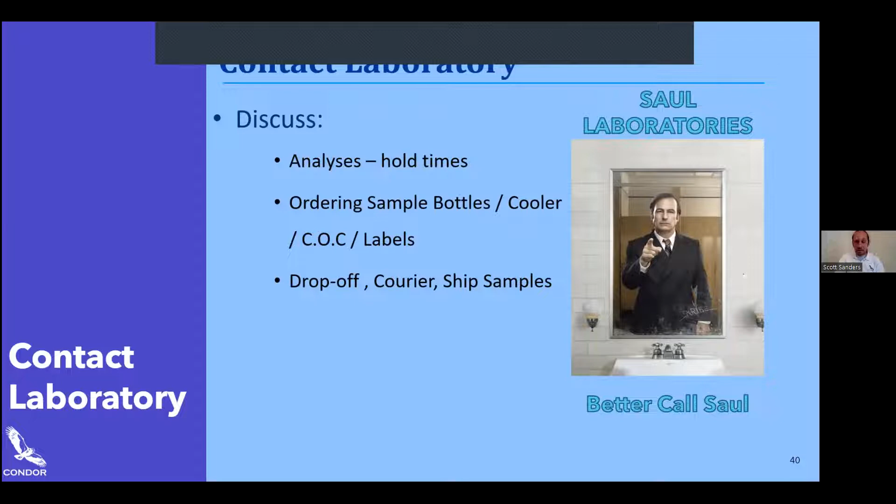So if you're not used to contacting a laboratory, well, let's get used to it, okay? Saul Laboratories is there—you better call Saul, because he's there to help you. If you go to a lab, they're going to help you. You come in and say, I have these constituents. They'll tell you, you need these bottles, you need to sample it in this, it needs to be in a cooler, fill out your chain of custody. That's just basically documenting when you sampled and the chain of custody when your sample went to the lab. Those are important documents to have. Just contact them and inspect bottle integrity upon receipt from the lab.

Training, this is huge. Delegate responsibility prior to rain season. Your sampler should be able to answer the what, when, where, and how, and train alternates, because it's rain season. People get sick, so always have an alternate, and always know who's going to be sampling. Those 24-hour industrial facilities, you have 4 hours from that first time of discharge, so you might have to sample at 3 in the morning. So who's on site at 3 in the morning? Well, hopefully they have a good plan to read so they'll be able to sample for you.

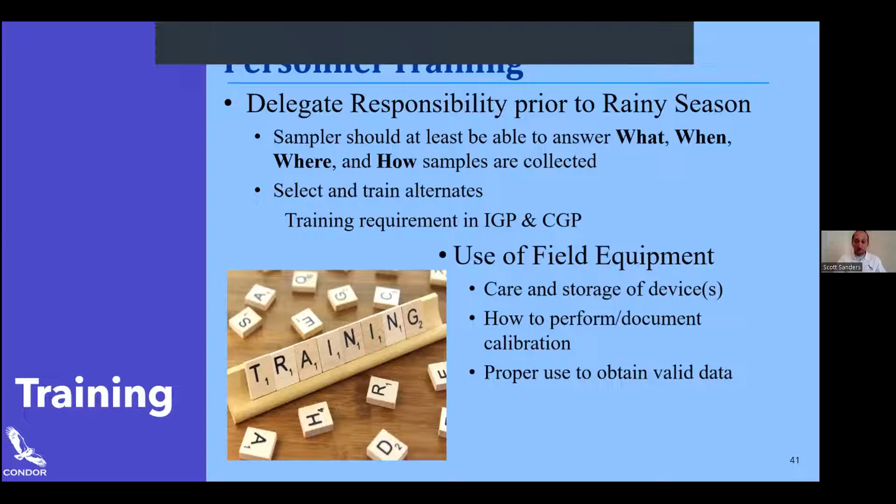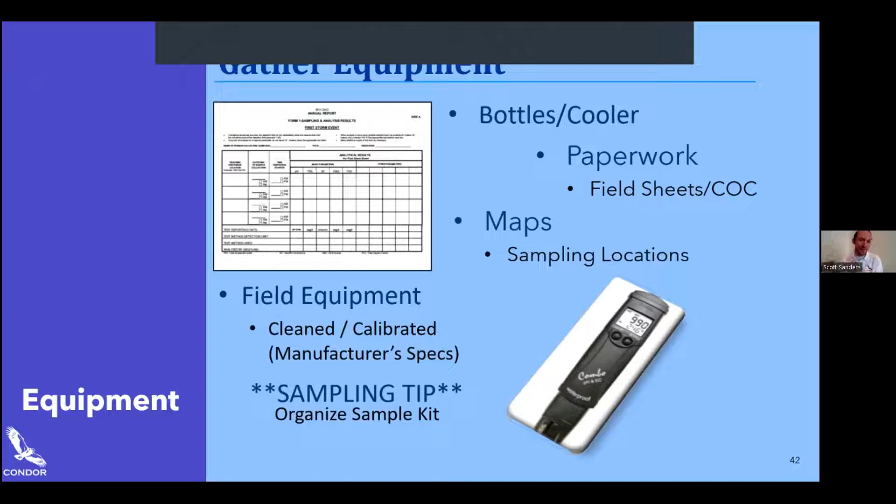My big pro tip with gathering your equipment is organize your sampling kit. An organized sampling kit will go a long way when it's pouring rain and you just don't know what's going on. Having organized sampling equipment with all your stuff in there will make your life a whole lot easier.

Glass versus plastic, is there a difference? Well, they're easy—why not use plastic everywhere? They don't break, and you can store them easily without breaking. So why not? Well, glass has many uses. Oil and grease can't be kept in a plastic bottle; it must go in amber bottles or glass. Amber is used just for the sun—they don't want certain preservatives getting damaged. So there is a big difference between glass and plastic.

Sampling tip: don't assume they're all created equal. Like I said, these bottles could be damaged, so make sure you've got good ones.

Preserved bottles—what does that mean? Preservatives in the bottle: basically, when you're pouring your sample in there, that preservative is freezing it in time, helping it stay preserved until it gets to the lab, because usually that's a couple hours down the road. So these preservatives can be harmful. Keep them cold, do not overfill, and get them to the lab.

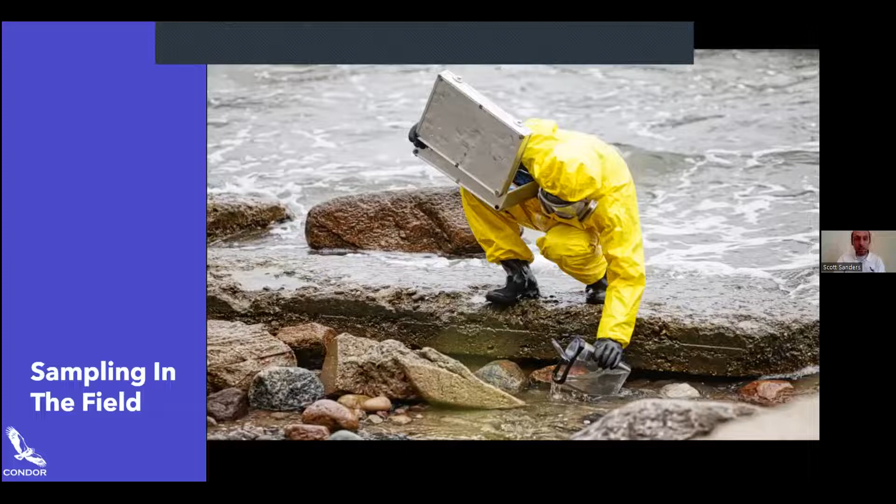So sampling in the field, again, always be aware of your surroundings. You never know what might come out and get you, okay? Watch out, there are dinosaurs in the field, so be careful when you're sampling and keep your eyes up.

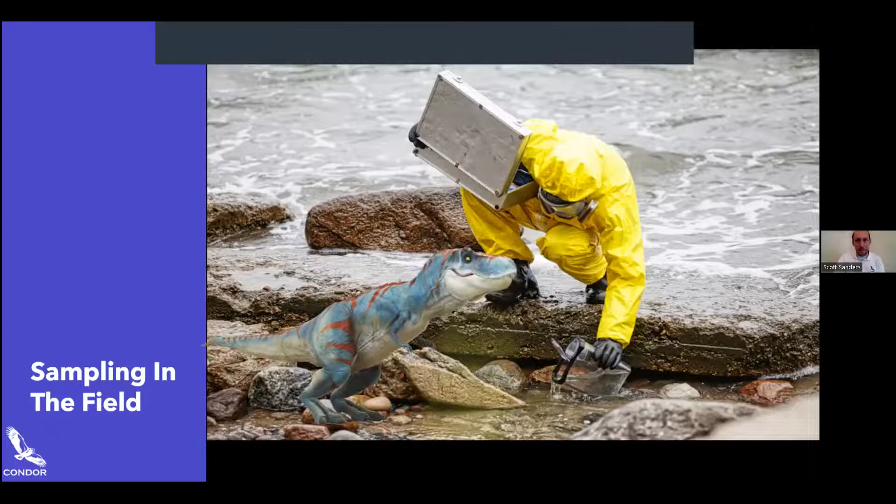So what are we doing when we're sampling? We're transporting from a sampling location to the laboratory for analysis without contaminating it yourself. How do you do that? Be aware of your surroundings, use clean sampling techniques, be methodical, and always ask the question: what am I going to do to adversely affect my sample?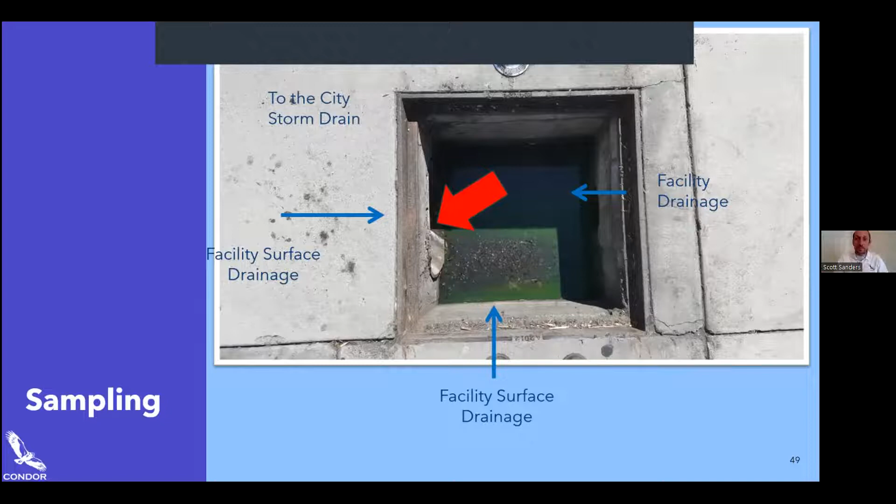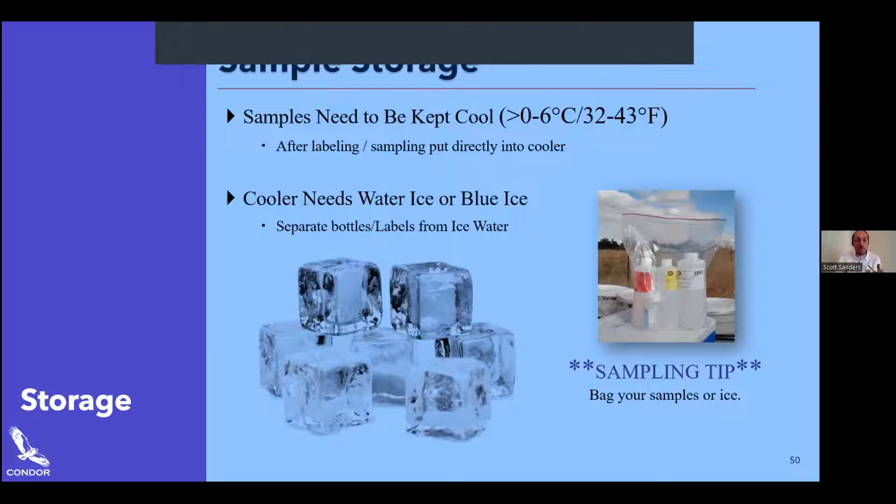So here's your typical industrial sampling. You've got your facility discharge drainage and your surface drainage. Where do I sample? Well, the storm drain that's going to the city—that's your discharge location for this site, and that's where you're going to want to collect your sample. You collect it, store it, keep it cool—it needs ice. Bag your samples, bag your ice, keep everything cool at what it needs to be. And then get it to the lab, have it labeled in its ice, follow that, and go to the lab.

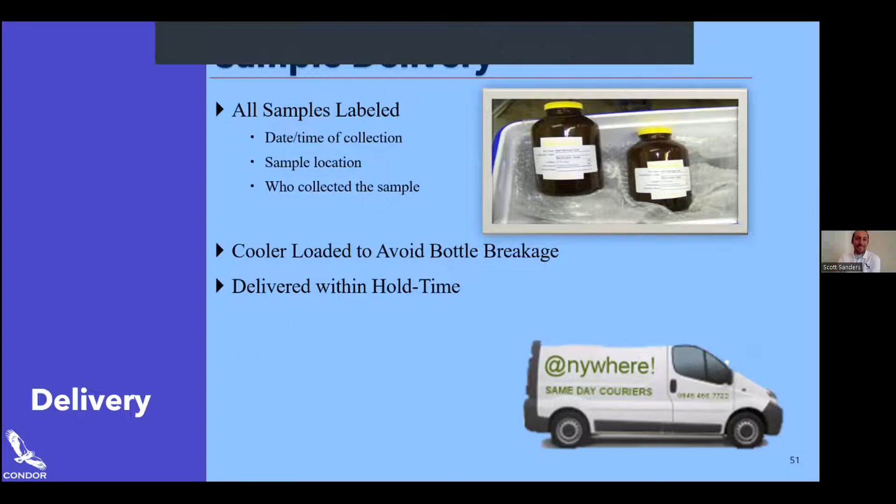And with that, I'd like to go to our final thought of our presentation, which is, again, as this whole stormwater week, rivers into the ocean—how do we all work together to stay in compliance and keep our beneficial uses in our rivers and streams? Well, it's working again with that trifecta: the developer, the consultant, and the regulator. It's all of us working together, all of us talking, all of us finding new ways to improve the way we do things going forward so it benefits everyone. I want to say thank you, and that was the presentation.